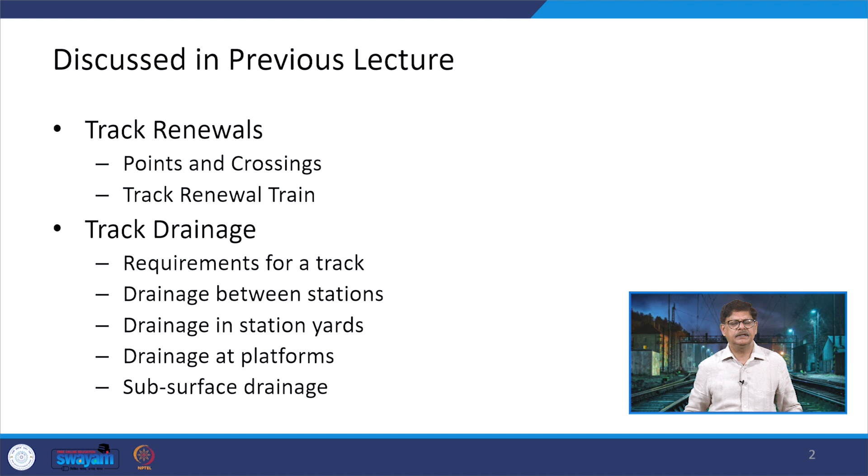Today, we are going to specifically talk about the high speed tracks. The high speed tracks are the need of today. As you know, as a nation, we are moving towards the provision of tracks which can take up the movement of trains moving at speeds like 160 kilometers per hour, and tomorrow it can be 200 or 250 kilometers per hour. So, if these types of tracks need to be provided, then we should know what are the effects of those high speeds, and those effects will define what type of modernization is to be done.

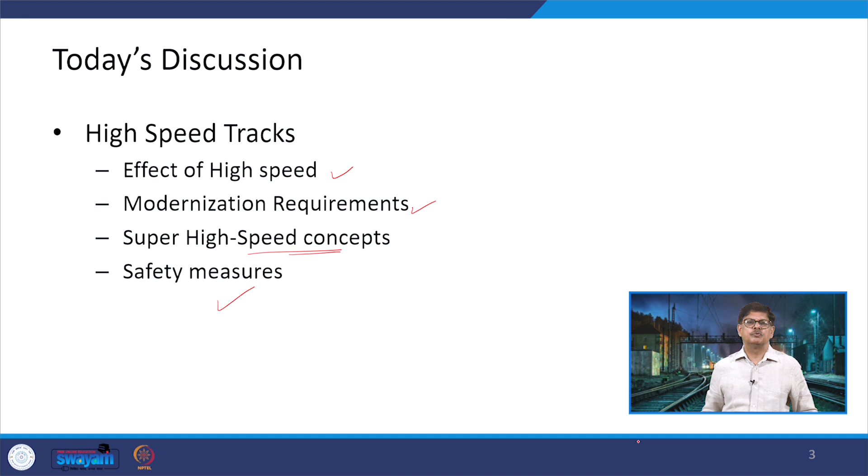And then once we talk about these aspects, we will try to see what are the various concepts which are usually used so as to attain super high speeds for the trains. And then some of the safety measures will be discussed, primarily the measures which are already being adopted for the Mumbai Ahmedabad high speed rail corridor.

Now, high speed tracks are the tracks which allow the operation of trains at speeds more than 120 kilometers per hour. If you remember when we discussed the various types of tolerances or criteria, they were dependent on the speeds, up to 50 kilometers per hour or 100, 110, 130, 160 kilometers per hour. So, in that light, if we are going above around 120 to 130 kilometers per hour, it is falling towards the high speed. But within that high speed there can be a normal high speed and a super high speed.

Now, why is it required? Why should we now transform towards high speed tracks? When we say high speed tracks here, we are talking about the tracks which can sustain high speed movements. First thing is the rapidly increasing demand of transportation. We need to take the people to the other side as fast as possible without losing time in the travel, because that is productive time.

Running heavy loads at faster speeds safely as well as economically. If you are moving at a very fast speed, then there may be an issue with respect to the track layouts, the geometry. So, safety is a prime important factor here, and we need to take care of that. But at the same time, when you are going for modernization, for higher requirements, that is going to cost. So, how economically that can be done is another aspect that needs to be taken care of.

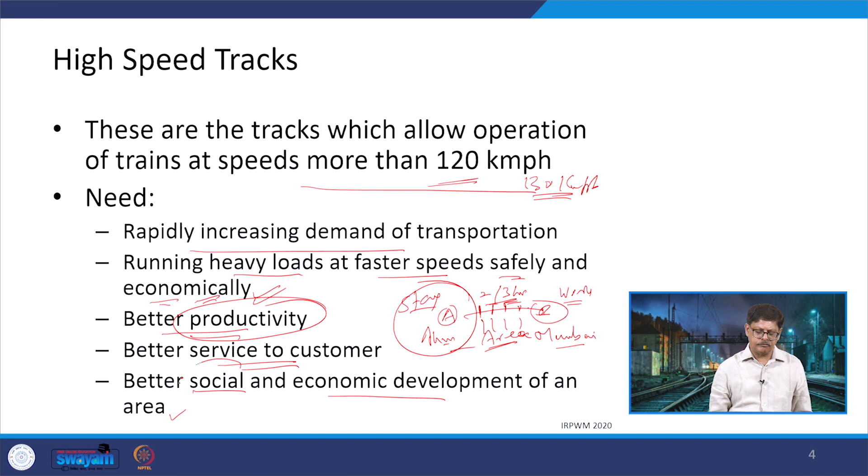So, the area in Ahmedabad may start flourishing more. Or if you talk about the various stations which will be there on the way, around 10 stations are there. So, those stations are also going to develop, or when I say stations I am talking basically the area related to those stations. So, that development will come, and when this development comes it can be in both the forms, in the social form as well as in the economic form.

Now, as I said, when you go into the high speed, there can be normal high speeds where you are talking up to a speed of say 250 kilometers per hour, and there are speeds which can be above 250 kilometers per hour, which falls in the super high speed conditions. Now, when you have to go even to 250 kilometers per hour, there is a requirement of modernizing the tracks. The standards need to be improved, they have to be taken at a higher level.

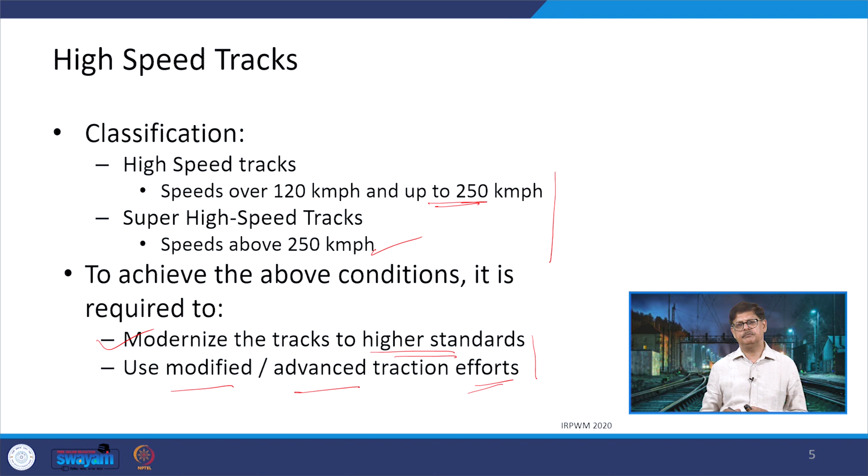Similarly, the control systems, the traction efforts, S and T systems which are provided so as to control the movement of the trains, they also need to be improved upon. So, new technologies need to be embedded so that the safety can be ensured while maintaining the efficiency of the system. Now, what are the various effects of the high speed? Let us look at that.

The track irregularities which are resulting in pitching, rolling, bouncing and lateral oscillations of the vehicle. So, those parasitic movements will be there, because now you are talking about the x axis, the movement on the y axis, or the movement with respect to the z axis. So, the movement is in the direction, or it can be in terms of rotation about that axis.

Pressure and stresses will be there, and because of this, problems will get generated in the rolling stock, the rails which are being provided, the wheels which are running at the top of the rail. Now, why are these happening? There is a resonance effect. As soon as the wheel starts moving at the top of the rail and the speeds are getting higher, there is a sort of resonance which will get induced between the two systems which are in contact.

So, the resonance between the frequency of application of the load and the elastic oscillations of the track, and this may be at a certain location or this may be happening all along the track. So, this resonance is one big factor which limits the speed, and this also causes a problem with respect to the wear or failure of components.

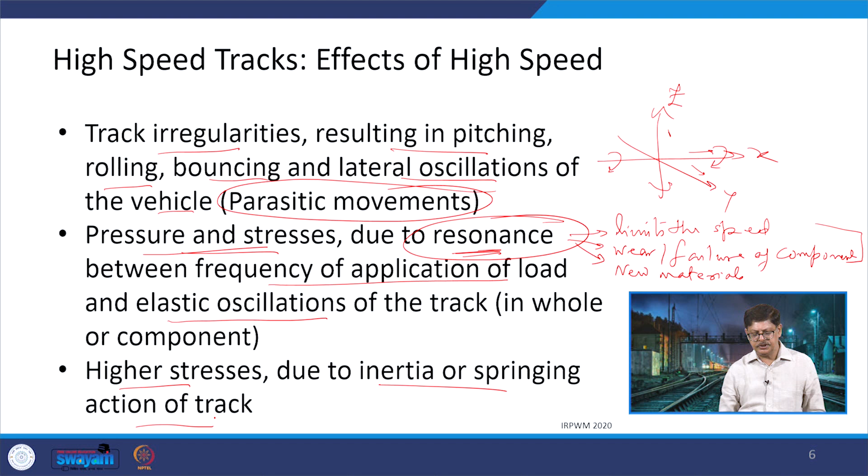The higher stresses due to the inertia or the springing action of the track is another issue which will be there. There are unbalanced weights, there are unsprung masses. We discussed these when we took the track resistances and the stresses. Suspension characteristics, and these suspension characteristics become more important when there is, say, a movement on the curve. So, when there is a movement on the curve,

the body is moving in this form, but if we are going into a cant situation, then the way this suspension system is working so as to balance the loads, you may find that the suspension is going in this form. So, here there is a depression, whereas this remains in position as such, or it is getting elongated towards the top. So, those types of suspension characteristics will also induce the various types of parasitic movements.

Wave formation. Now, one wave formation we discussed when we were talking about the creep, if you remember, and there we said that the wave can be formed in the rail and then carried forward, and that induces the creep. Now, here when you are having a very high speed, you can understand the type of wave which gets formed and gets carried, and what is going to happen because of that is what we will be discussing in a bit more detail. Then adhesion between the wheel and the rails when they are moving at higher speeds.

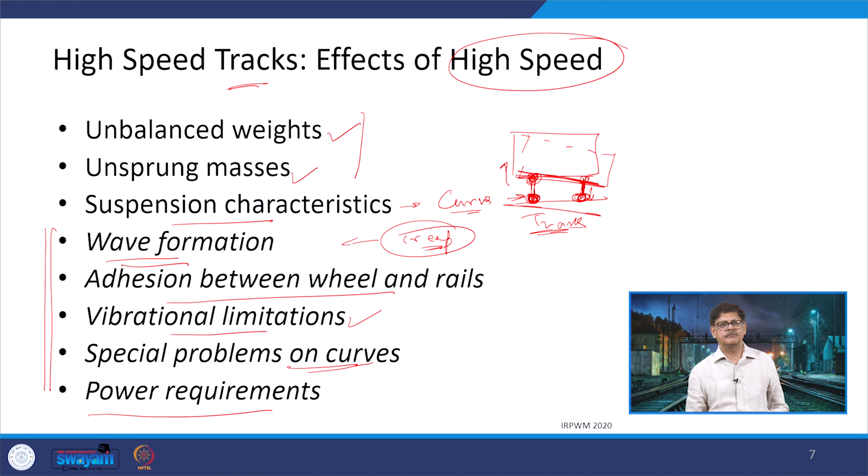Now, propagation velocity of a wave in a medium sets the speed limit of a body moving in that medium. So in whatever medium is there, the propagation velocity is going to define what should be the speed of an object which is moving in it. The higher speed than the speed in the medium requires more power, because whatever resistances are being induced due to that, you have to overcome them.

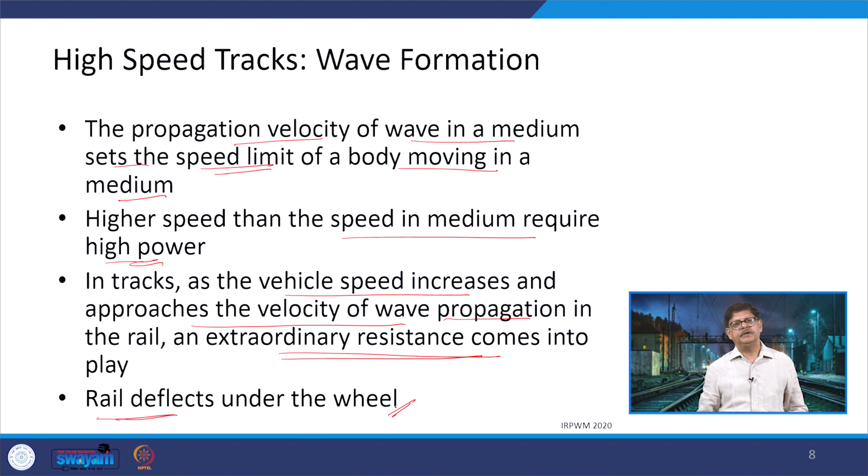In tracks, as the vehicle speed increases and approaches the velocity of the wave propagation in the rail, an extraordinary resistance comes into play. So now the two things are approaching the same, the vehicle speed and the velocity of the wave propagation. And at this point, when these two are approaching the same value, there are problems with the deflection of the rail. So this will be a problem in terms of high speed and the stability of the vehicle.

The wheel is accompanied by large amplitude stationary waves which can even destroy the rail. And this propagation velocity of the deflected wave of the rail sets a speed limit for the train. The research was done for that on the New Tokaido line in Japan. All the experiments were done with respect to different types of ratios.

So this is the first one we are talking about, and it said that if you look at the velocity of the wave as well as the speed of the train, the restriction will be up to 1800 kilometers per hour. That means we can go up to this limit. So it's a very high value.

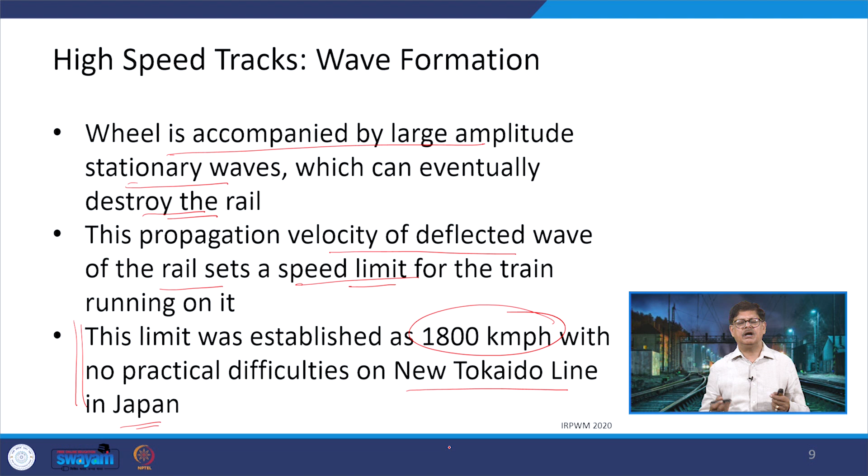The similar phenomenon exists between the pantograph and the overhead wires of the electrified railway. When you talk about any vehicle which is moving, at the top it has a system by which it can take the power from the pole. This pole has the system by which the power is given to the pantograph. Now when the speed increases, these two are interacting.

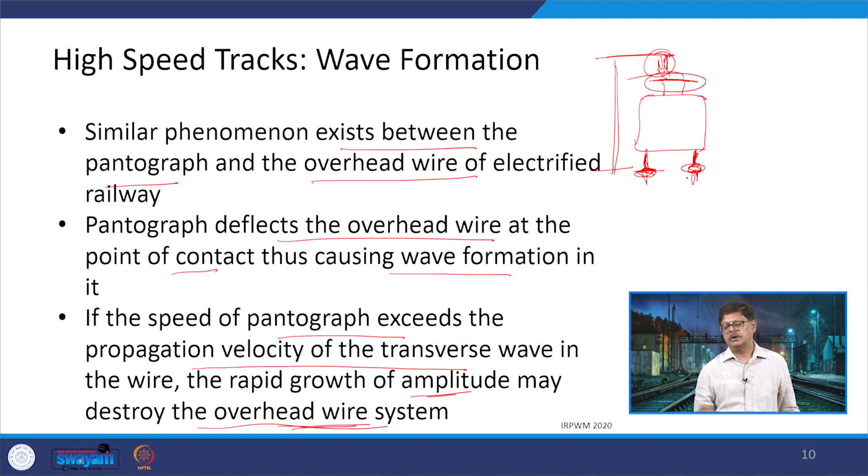When these two are interacting, the pantograph deflects the overhead wire at the point of contact, thus causing wave formation in the pantograph or the overhead wire. And if the speed of the pantograph exceeds the propagation velocity of the transverse wave in the wire, the rapid growth of amplitude may destroy the overhead wire system. So this is another limiting condition. One condition was with respect to the wheel and the rail. Another condition is coming on the top. This transverse propagation velocity of the wave in the overhead wire sets the speed limit.

And again on the same line where the experiments were done, the New Tokaido line in Japan, this critical value has come out to be 400 kilometers per hour. So there is a drastic reduction from 1800 kilometers per hour, which was there when we were talking about the resonance, the frequency and the propagation of the wave in the rail and the speed of the train. So there it was 1800, but now it has reduced to 400 kilometers per hour.

The speed can be increased by increasing the tension in the overhead wire or by developing a lighter wire material. But for both of these things there is a limit up to what particular level the overhead wire can be given tension. Based on the properties of that wire, there is one point at which it will not be able to take further tension, and that becomes a limiting value. On that basis, we can examine up to how much this speed can be increased from 400 kilometers per hour. Similarly, if you talk about a lighter wire material, this has an issue with respect to conductivity.

You cannot reduce the size of the wire below a particular value, otherwise it will be a problem in handling and in the way of working. So considering these two aspects, we need to see up to how much level the increase can be given beyond 400 kilometers per hour.

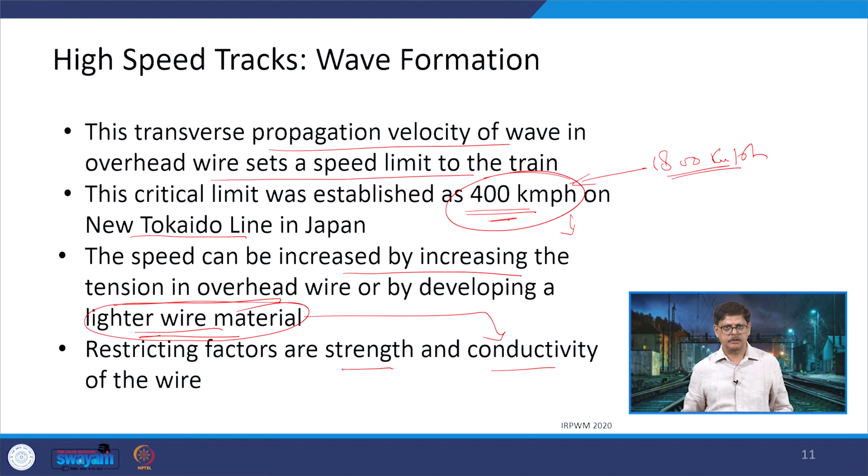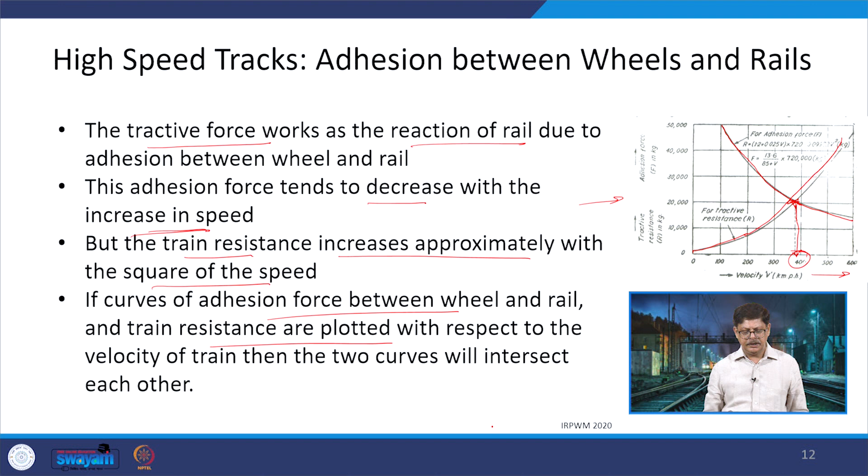Now, when these two graphs are taken, there is a point of intersection of these two graphs, and that point of intersection gives the speed at the bottom. So the adhesion curve between the wheel and the rail, and the train resistance curve, are plotted, and the two curves intersect each other at this particular intersection point.

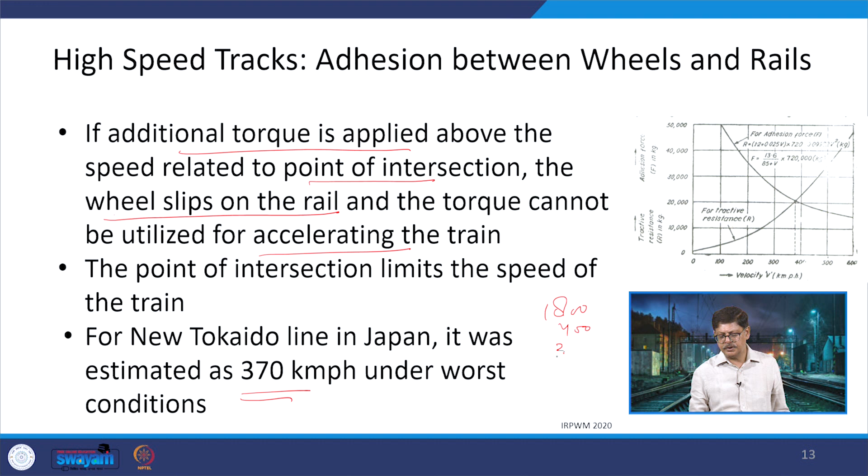If additional torque is applied above the speed related to the point of intersection, then the wheels slip on the rail and the torque cannot be utilized for accelerating the train because of the slip, so that torque gets wasted. The point of intersection is limiting the speed, and this has been observed as 370 kilometers per hour under the worst condition. So we started at 1800, then in the next criteria came to 400, and now we are coming down to 370 kilometers per hour.

Now, if you have to increase this speed from 370 kilometers per hour, what are the possibilities? One is you reduce the train resistances. If you reduce the train resistances and it cuts at some longer distance, you are going to get a higher speed. So innovative techniques like use of linear induction motor, jet propulsion, etc. can be used to reduce these train resistances, and these are actually used when we try to go for super high speeds.

Then raising the adhesion between the rail and the wheels requires the development of new materials which are superior to steel.

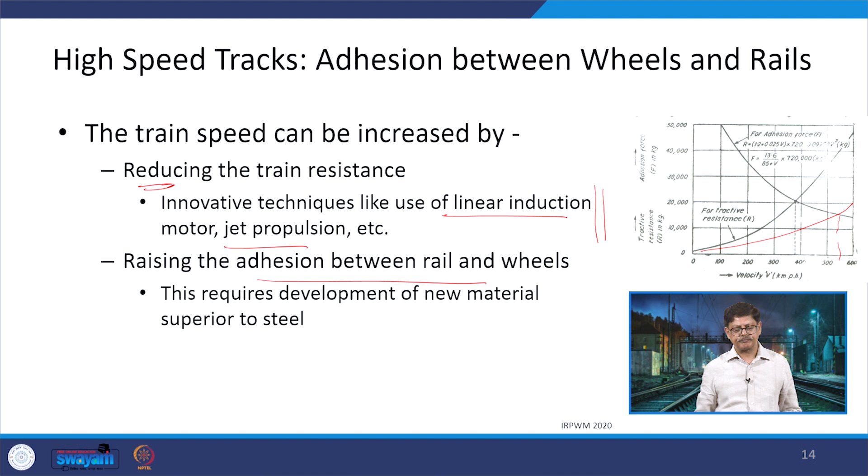Now talking about vibrations, track irregularities cause vibrations, and as speed increases, vibration also increases and gets propagated along the length of the track as well as towards the side in the transverse direction. There are unstable self-excited vibrations in the rail vehicle even if the rail is geometrically straight, meaning it is going very straight on the section with no issues. Even in that case, there are some self-excited vibrations, and this phenomena is known as hunting.

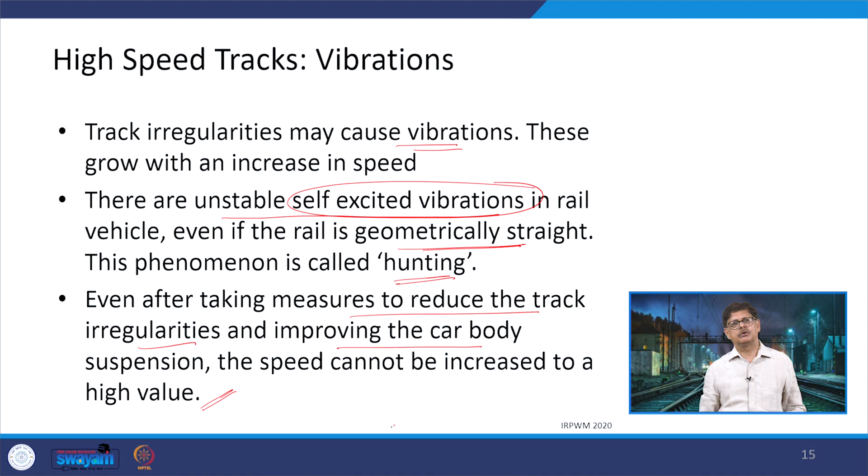Even after taking measures to reduce track irregularities and improving car body suspension, the speed cannot be increased to a very high value because of these vibrations, and this has been observed to get limited to a value of 350 kilometers per hour. Previously, in the previous criteria, we talked about 370, so there is a bit of reduction here.

Now, if you have to increase upon this particular speed, then what we need to do is float the train a little above the surface of the track or the rail tabletop. That means it is sort of an air-cushioned vehicle we are talking about. So the train is not touching the track when it is at speed; there is an air cushion in between.

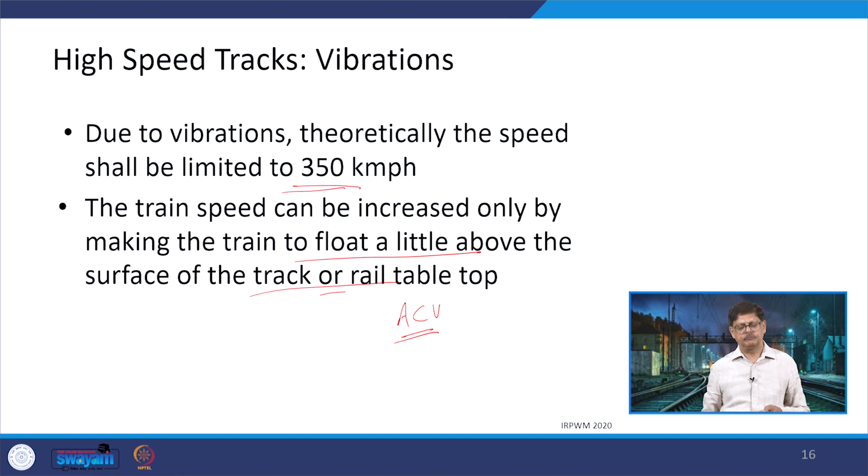In the case of curved tracks, there are obvious problems. There is an unequal load that can come on the inner and outer rails, and this can create a possibility of overturning or other issues. This is usually balanced by the provision of a super elevation.

So we super elevate the track, and on the basis of that the effect of centrifugal force, which may be causing these unbalanced weight issues, is taken care of. But what is the limit up to which we can increase it? Can we increase it indefinitely? There is a limit up to which we can go in increasing the cant, and this also limits the speed, because super elevation or cant is correlated with speed.

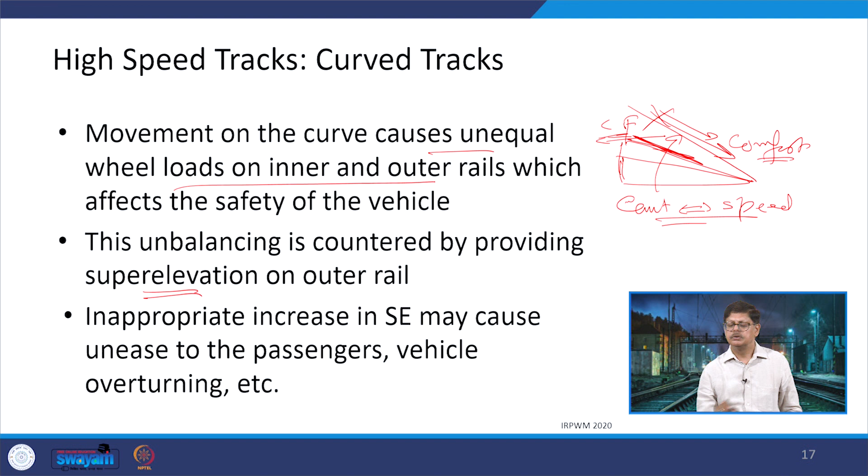But if we go too far in this form, there is a problem of comfort to the passengers. There is always a possibility of the vehicle sliding towards the inner side, so the adhesion is going to be lost more in this case. So there is a limit up to which you can go. Maybe we will not be able to go up to the extreme, but we can go up to a particular value, and that value needs to be identified.

Experiments were done again on the same line, the New Tokaido line in Japan, and it gave a value of maximum lateral acceleration of 0.05 centimeter per second square, which resulted in a cant value of 180 mm. At this particular criteria there was not much discomfort to the passengers.

So if we use this 180 mm cant and a radius of 2000 meters, it comes out to be a balancing speed of 200 kilometers per hour. That means if we increase the radius further, this speed can be increased. So if we go to 3000 meters, it increases further, but we cannot increase the cant value because this is the limiting value and we should not change that.

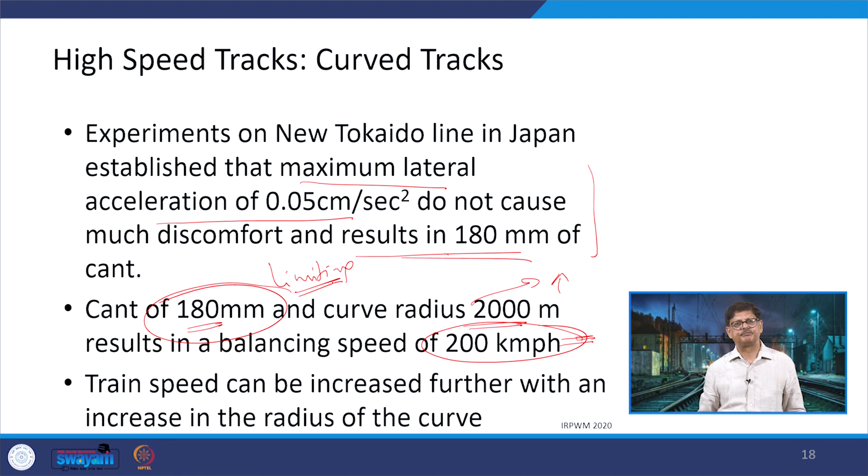So the modernization of the track is to be done. What are the things that need to be taken care of? Use of better designed rolling stock, use of higher standards of track components, better telecommunication and signaling systems and their standards and specifications, and use of modern techniques for inspection as well as maintenance.

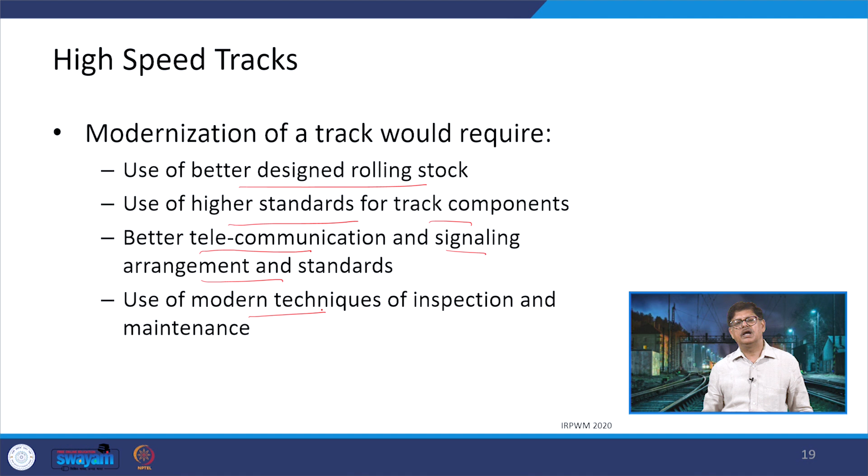Some of the things we are taking up here include electric traction with higher power. Heavy rail sections can be utilized where there is more wear resistance, use of SEJs with LWRs and CWRs, use of PSC sleepers, and higher sleeper density per kilometer, maybe more than 1660.

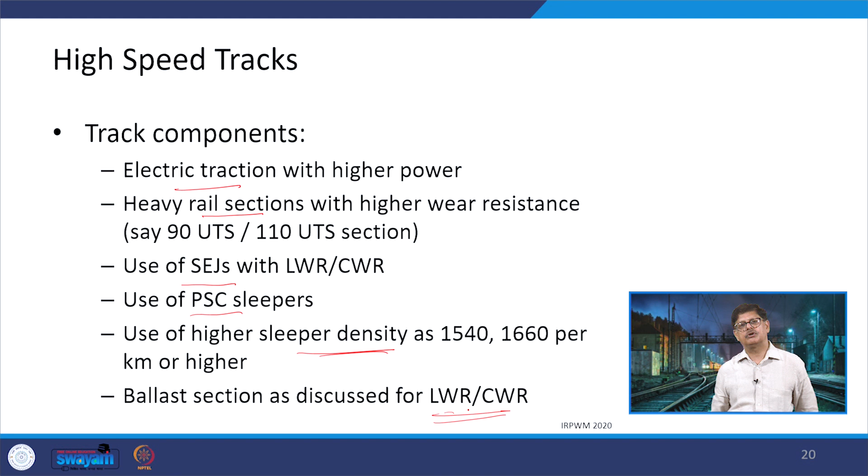Ballast sections as being talked about in LWR or CWR, elastic fastenings can be used, and integrated track assemblies shall be used.

Then in the case of turnouts, a crossing of more than 1 in 16 is better. If we talk about the Mumbai Ahmedabad high speed rail, there it is being used as 1 in 18. Then higher cant deficiency is dependent on the actual cant and on the permissible values of deficiency that are there.

Use of cast manganese steel rails at the crossings and curved switches, and use of USFD ultrasonic flaw detectors to check flaws in the rails before they are used in the track.

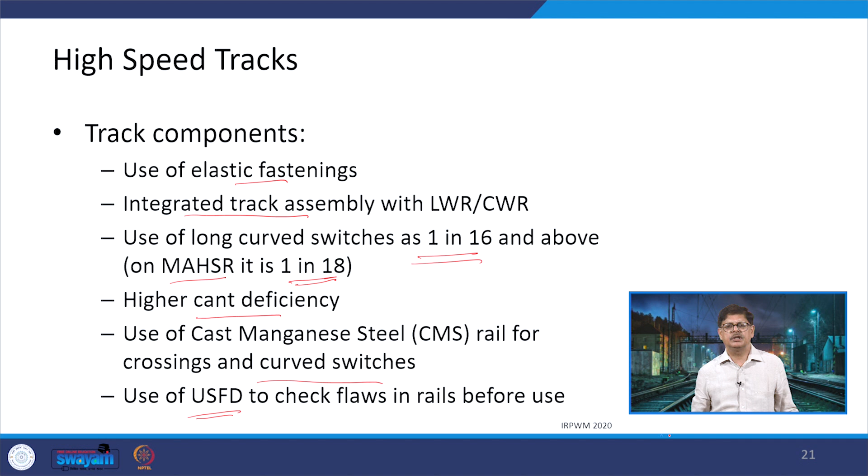Some of the track geometrics are being shown here for a permissible speed of up to 160 kilometers per hour, and the degree of the curve is changing. If it is only half a degree, then the radius can be 3492. For that equilibrium cant and proposed cant deficiency, the transition curve length is given accordingly.

But as it increases to 1 and 1 by 4 degrees, the transition curve length increases to 180 meters, though the radius reduces here to 1395, because the degree of the curve and the radius are correlated by a formula.

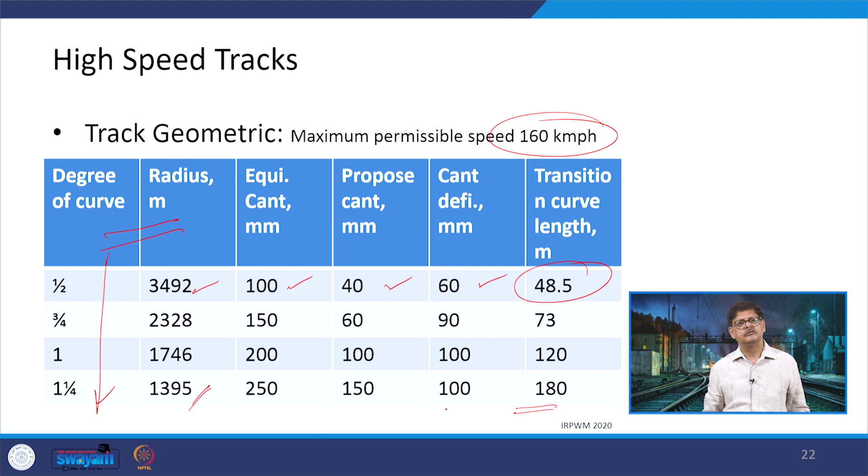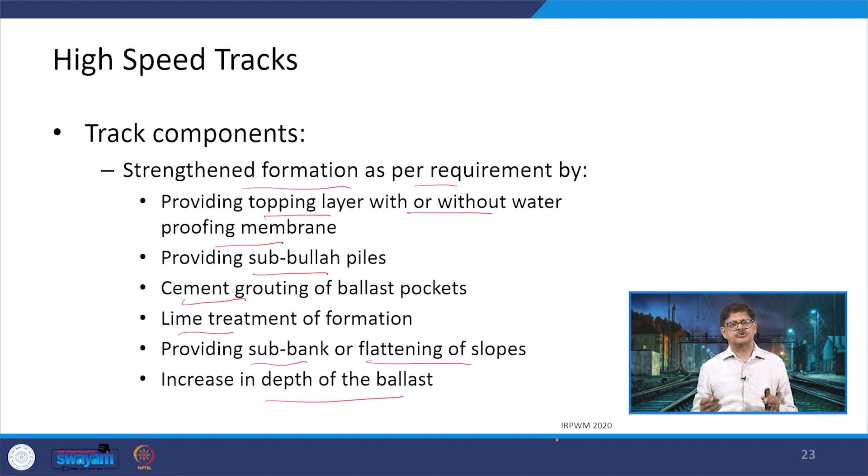Another important aspect is the type of traction which is required. This traction can be talked in terms of specific power, defined as the power required to move 1 ton of the passenger rolling stock, and it is correlated with the different types of resistances, speeds and accelerations.

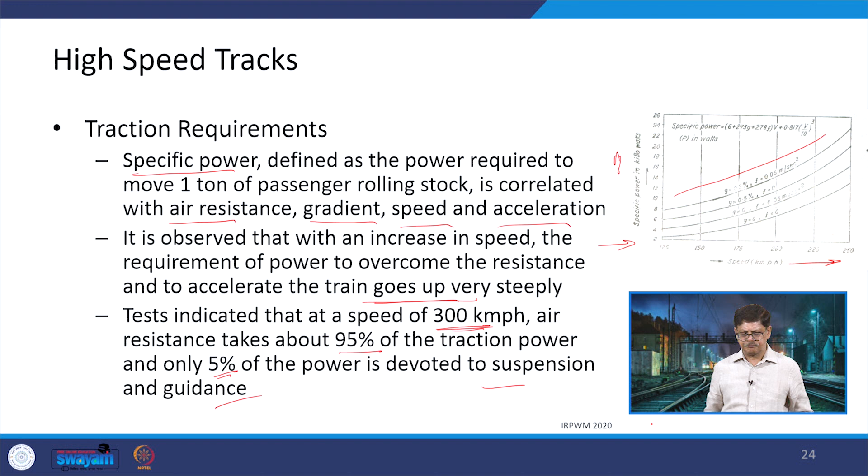One thing which is to be done is to have a GIT, a general inspection train. This general inspection train has a number of wagons or cars equipped with the equipment required for inspection, to measure the various parameters related to the track which we discussed in the case of track maintenance - tilt, twist, gauge, alignment, and unevenness on the rails left and right. Along with accelerations in the vertical and lateral directions, the power supply, signaling and telecommunication systems - with respect to all of these things, the equipment is available on this train, and it can then be used for inspection. This train can go up to a speed of 320 kilometers per hour, so as to identify if any component of the track is not behaving in the correct manner.

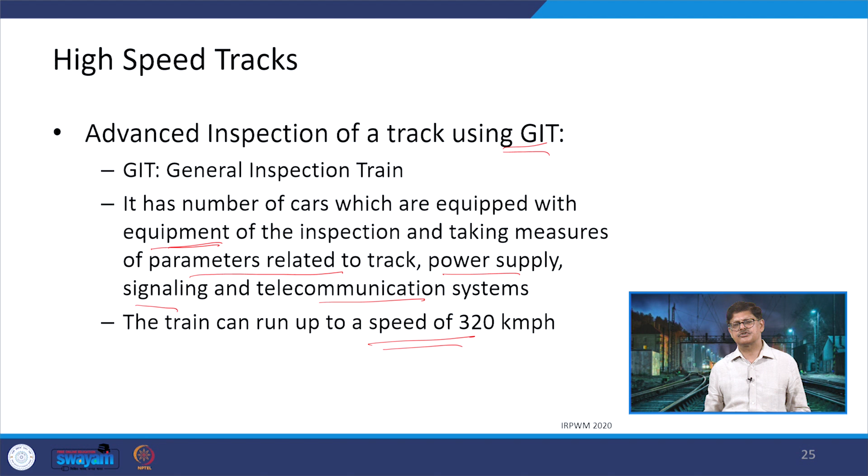Let's look at the super high speed concepts here. One is the linear induction motor. It helps in attaining very high speeds. The thrust is produced without physical contact, and therefore it can be used with any type of guidance system. It is free from adhesion and can reach a speed up to 350 kilometers per hour. Another is the linear motor and air cushion system, and this combination can go up to a speed of 500 kilometers per hour - an air cushion system with tracked conditions.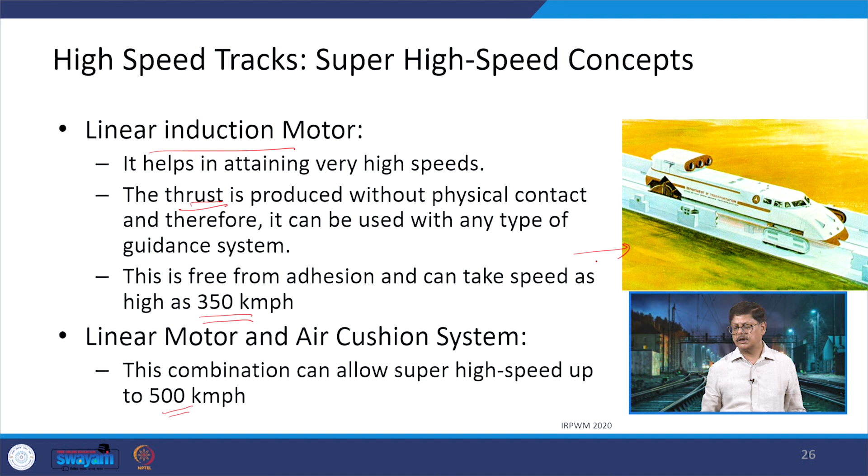Gas turbine and air cushion, or jet propulsion, is another way of doing it. This tracked air cushioned vehicle, shown in this photograph, accelerates with aero propulsion to 200 kilometers per hour in 2.5 minutes. If it is going with the linear induction motor propulsion system and core gas thrust, then it can attain a speed of 380 kilometers per hour in 1 and 1/4 minutes using a single motor. And if two motors are used, it can reach a speed of 480 kilometers per hour in the same time.

Then there are braking distance requirements, because if you are moving at such a high speed, you have to brake it when reaching a station or in an emergency. The distance required is 1280 meters for a speed of 280 kilometers per hour, and for a speed of 480 kilometers per hour this is 2400 meters. Here a comparison has been shown with respect to speed on the x axis and the propulsion efficiency for different systems - the turbojet, the turbofan, the turbo propulsion, and the linear induction motor.

In the case of linear induction motor, the efficiency is constant at 100%, but in the rest of the cases you are getting the maximum value at a certain speed. Say for turbo propulsion it comes out to be somewhere between 320 and 640. Then if you talk about turbofan, this is coming very near to 960, somewhere around 800 in this range, and in the case of turbojet it is continuously increasing.

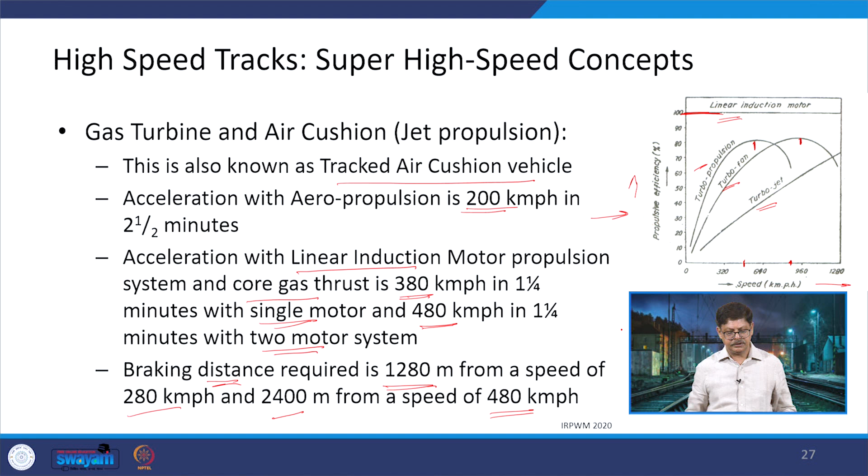Another system which is available is known as Maglev, or magnetic levitation. Here what is being done? The passing of the superconducting magnets by figure 8 levitation coils on the side of the track induces a current in the coil and creates a magnetic field. So, if you see on the right hand side, there is a guidance system provided on both the sides, and within that guidance system there are coils being used. There are figure 8 coils used here, as well as propulsion coils.

At the bottom this is a wheel support path. All of these vehicles are going to be provided with wheels. They will be given the initial power, and with that initial power the vehicle will start running on these support systems with the pneumatic tired wheels and attain a particular speed. As soon as it attains a speed of 80 kilometers per hour, by that time all of these things get charged and the vehicle is lifted above the track by a height of 100 mm.

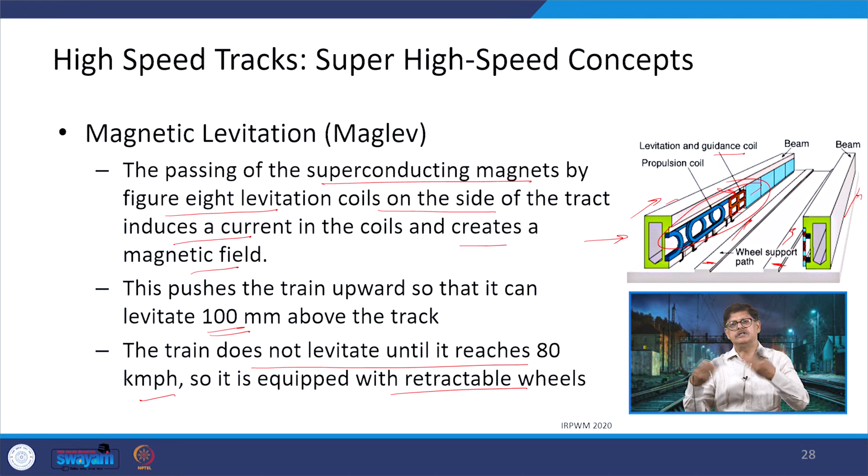And now the resistance offered by the track is not there, it has come into the air. The guidance systems and the propulsion systems take it up, and the propulsion coils give a force to the vehicle to move in the forward direction. So, it does not levitate unless it reaches a speed of 80 kilometers per hour. It is equipped with retractable wheels, so as soon as it goes into the air the wheels will go inside, the same way as it happens in planes.

Now, when one side of the train nears the side of the guideway, the superconducting magnet on the train induces a repulsive force from the levitation coils on the side closer to the train, and an attractive force is generated from the coils on the other side, and this keeps the train in the center of the track. So, if it is going to the left side, a repulsion force is generated here and an attraction force on the right hand side, and that is how it will come back to the center.

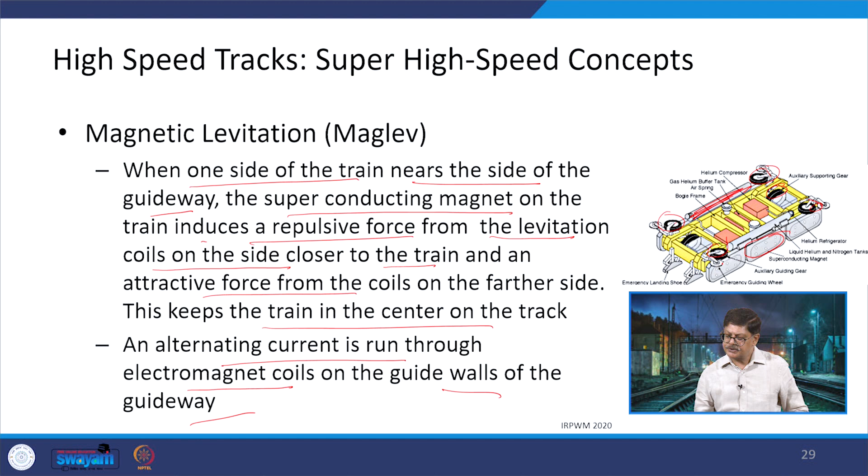An alternating current is run through the electromagnetic coils in the guide walls of the guideway, and here you can see the assemblies. Emergency guide wheels are provided. There are auxiliary supporting gear systems and the wheels are also there. This is a bogie frame, and within that bogie frame there is an assembly shown here, a gas helium buffer tank which is used for cooling purposes, and these are the magnets. Actually the magnets are provided on these sides.

Now, the system we are talking about creates a magnetic field that attracts and repels the superconducting magnets on the train and propels the train in the forward direction. As you can see here, this is the guidance system. Within that guidance system all of these magnets have been provided, and these superconducting coils or magnets are helping to generate the speed and propel the system forward. At the top you can see another assembly which I was showing you in the previous diagram. This is a liquid helium tank or a nitrogen tank, and it keeps it in cooling conditions.

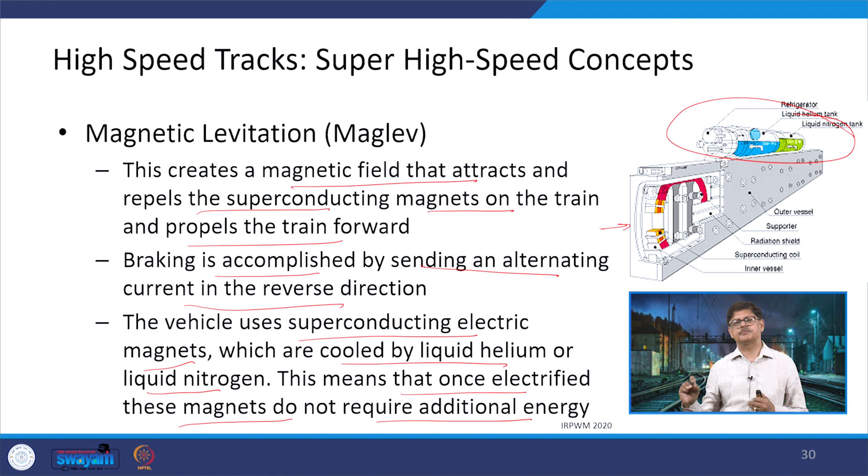Braking is accomplished by sending an alternating current in the reverse direction. As soon as this is done, it starts reducing the speed. The vehicle uses superconducting electromagnets which are cooled by liquid helium or liquid nitrogen. This means that once electrified, these magnets do not require additional energy. So, that is the best side of it. Initially, up to the time when it reaches a speed of 80 kilometers per hour, it requires energy, but after that it is not required.

Now, let us look at some of the safety features which can be provided on track. As I said, these are being taken from the features already being adopted for the Mumbai Ahmedabad high speed rail track. So, one is crash avoidance through DS-ATC, the automatic train control system. It has a speed check pattern. So, it will check the speed and try to bring the speed to lower values.

We have discussed this device when we were talking about the various new technologies. So what it does is, if it is going on a track where there is a possibility of derailment and overturning, then that will be avoided, and at the same time the possibility of a collision between two trains will also be avoided. So, it helps in that two-way form.

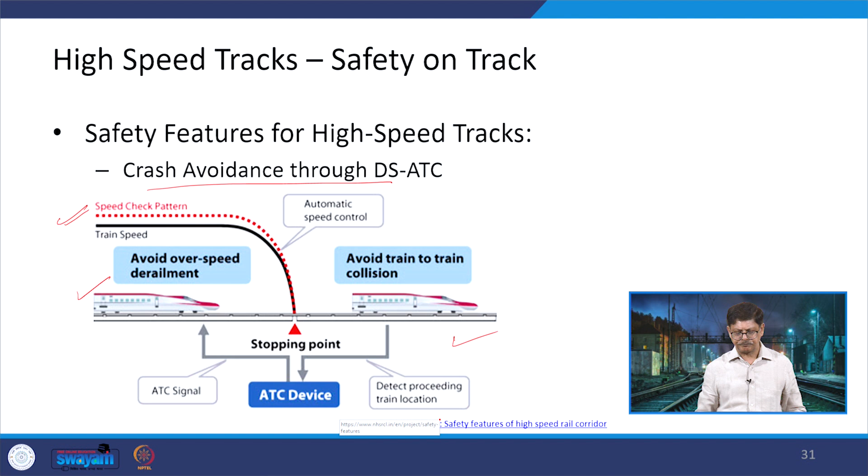Another feature is an early earthquake detection system. So, if you see here, the corridor is going in the elevated form, and there are certain things provided at certain locations. The signaling aspects or the control aspects can be there. So, if there is a possibility of an earthquake, then what does it do?

This system enables automatic power shutdown when primary waves emerging from an earthquake epicenter are sensed. Trains will have a power failure detection device which will invoke the emergency brake when the power shutdown is detected in such cases, and thus the safety of the passengers as well as the infrastructure is maintained.

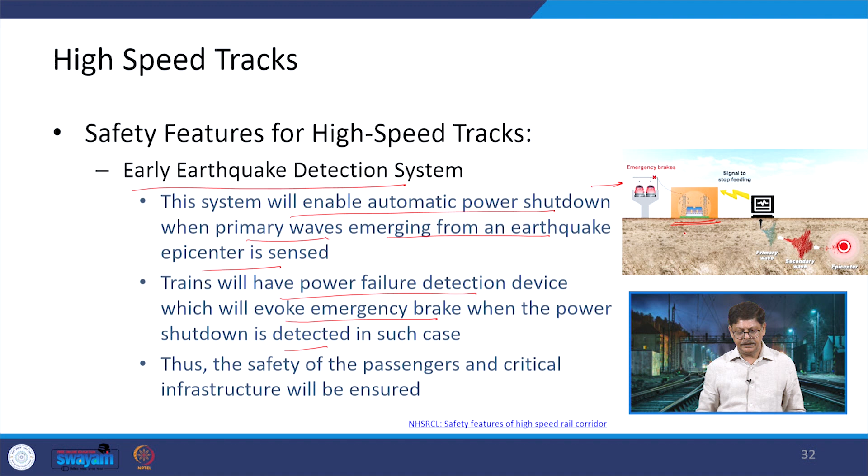Now, another thing is the continuous monitoring of the rail temperature and wind. High speed rails will be fitted with a network of sensors monitoring the rail track temperature and rain. There are special sensors for that, as well as anemometers for wind monitoring.

Now, if you are in a high rise condition, that is, an elevated corridor, and there are heavy winds, then at that point of time the operation may be problematic and safety may be hampered. So, as soon as the crosswind speed goes above 30 meters per second, it will give an alarm signal to the operational control center so that the train can be stopped. So, these types of detection systems are also being provided.

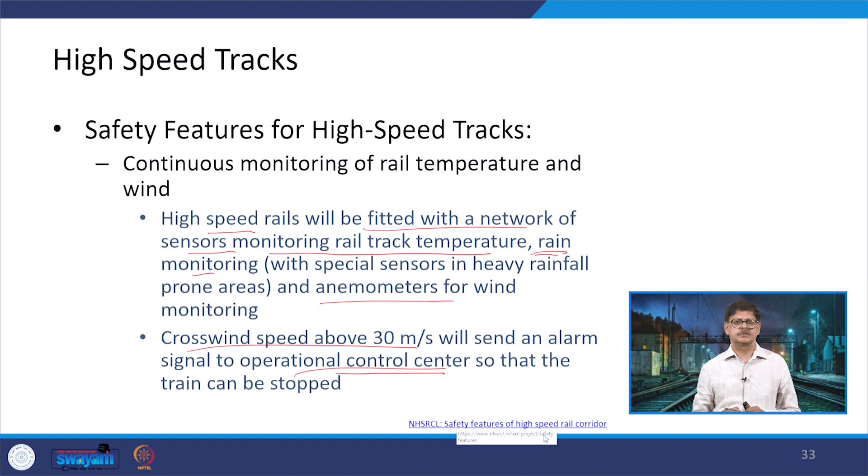So, when all of the information is available to the loco pilot in the cabin, the loco pilot is able to take an informed decision. As per the requirement and the situation, the decision will be taken by the loco pilot in coordination with the operational control center. Of course, the pilot has to communicate with them to finally act on the basis of the decision taken collectively.

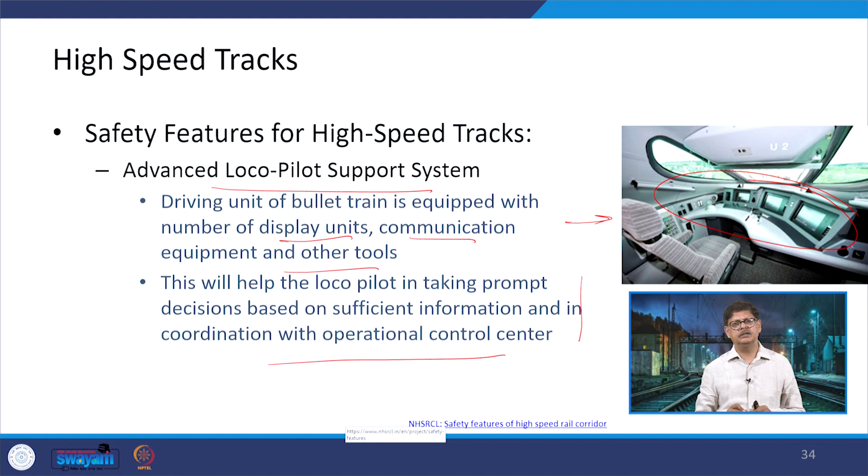So, with this we close this lecture. In this lecture we focused on high speed tracks, the effects induced because of the higher speeds of trains moving on the tracks, what can be done, what the possible speed values can be, and then we discussed the possibilities of modernizing the tracks, the various concepts which can be used to attain high speeds and have been used in different countries, and then the safety features which can and should be adopted when these types of operations are done.

Now, with this we are closing our overall discussion in this particular course. We have been discussing various aspects related to the railway tracks and the control of the trains moving on the tracks.